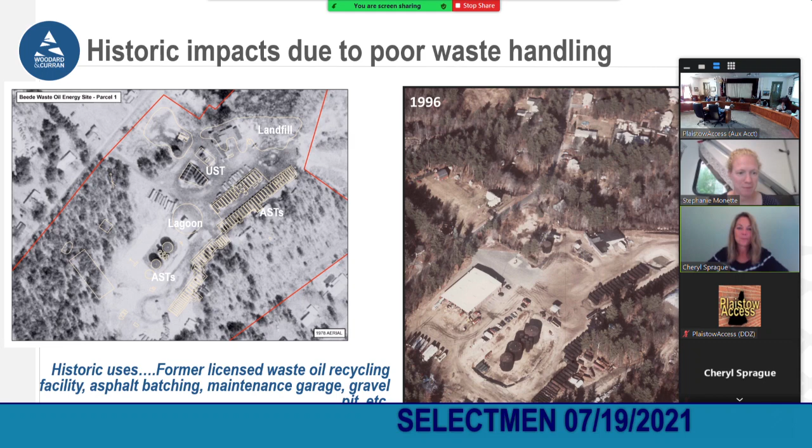Historically, this site's been in operation since the 20s, recycling oil. So you can imagine what it was like managing those types of things back then. These pictures, one's from 1978, an aerial, and the other is from 1996.

They were basically just tanks laying in a row. They were rented to people, and they would store oil in them and could come get their own oil. It wasn't all run by one operation, so it was quite a catch-as-catch-can type operation.

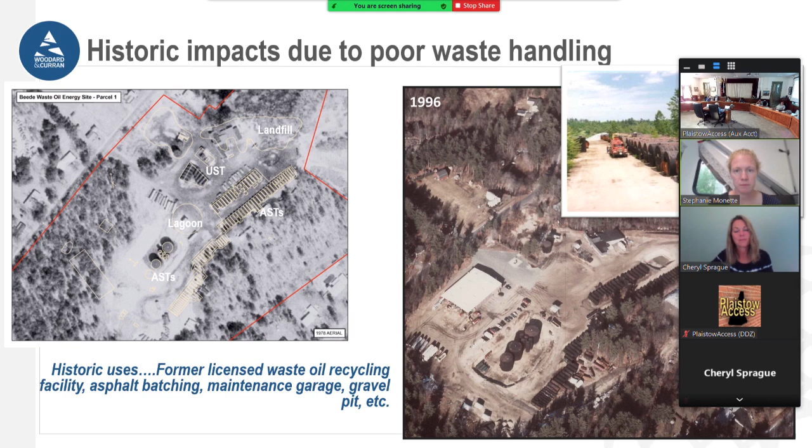The EPA did an initial removal action, which started everything. They got 1.1 million gallons of waste, oil sludge, and water removed. 800 drums were removed that had been stored on site, full of various oil and oil mixtures.

And in 2001 to 2005, they did a vacuum recovery system that the EPA put into place. There were pipes above ground with a huge vacuum system.

They extracted 90,000 gallons of oil out of the ground during that period, in a four-year period. 90,000, yeah.

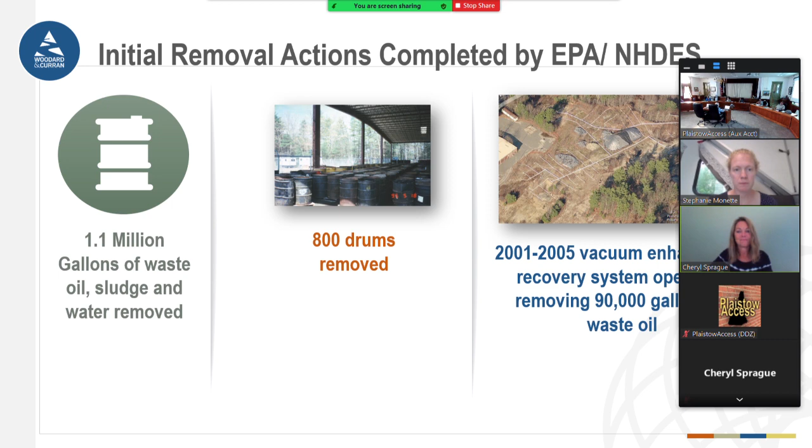Cheryl, do you want to cover this part? Sure. Can you see? Okay. Can you hear me all right?

Yes, okay, great. So as Mike said, the removal action addressed some of the more visible waste, the waste in the drums, the waste in the oils sitting on the water table.

But at the same time, there were investigations that were undertaken. They were called remedial investigations. And that looks at the soils, the surface waters, the groundwater.

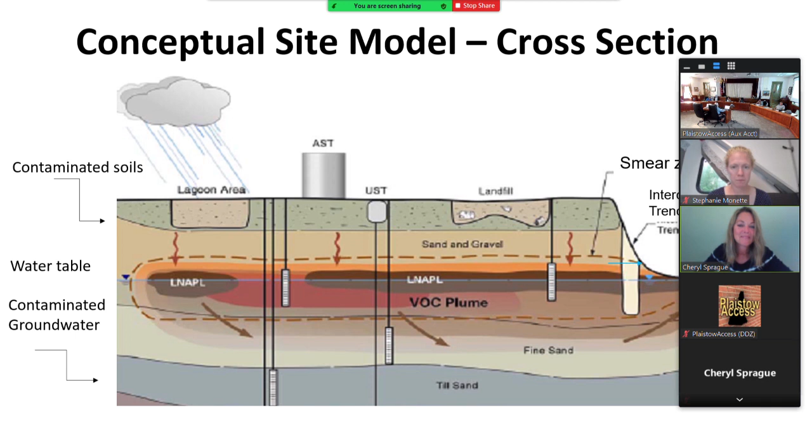You went through that one, so I'll go to the next one. In the end, when we take all that information together, EPA selected through this process a remedy intended to address all the risks identified, whether unacceptable contaminants in soils or groundwater, with cleanup actions intended to clean up for potential reuse. At this site, the area is residential, so the cleanup is intended to get to a residential reuse.

Since we've already been operating for a while, what I thought we could do is discuss the cleanup components we've already done or addressed. Then Mike can give more details on what we're currently doing. So this should come up.

The first remedy was addressing the groundwater, which was migrating. The first thing that happened was they built a groundwater treatment system as a component of the remedy and began treating it and discharging it on site. That was constructed starting in 2012 and was in operation by 2013. The other component of groundwater is long-term monitoring - in addition to treating groundwater, there's ongoing monitoring to assess if it's migrating, where it's impacting, and what the concentrations are over time.

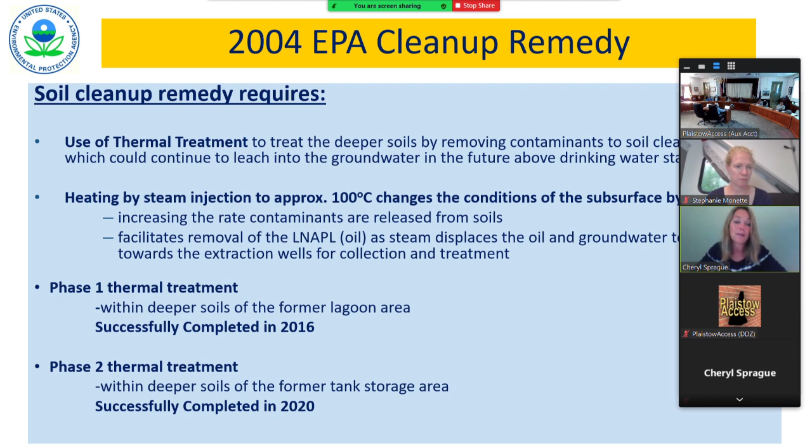We can come back if there's more details, and Mike will give you some of those. During COVID we didn't come back to present, but if you need more information we can continue with that. So those are the three parts of the remedy.

I'm not sure what the next slide is. Yeah, those are the three parts of the remedy that have already been implemented or completed as we went through this process. So it's a good time to ask, where are we in this process?

The Superfund process is a long process, but it moves you through steps: identification of a site, removal actions which address hazardous materials like mobile oils or drums, investigation, looking at alternatives, remedy selection, then remedial design, where you spend time designing how you're going to clean up the site, and then the actual remedial action, when you take those actions. When all these components of the remedy are completed, what you typically end up with at most sites is the long-term operation of the groundwater treatment system, because groundwater takes longer to clean up than addressing source soils.

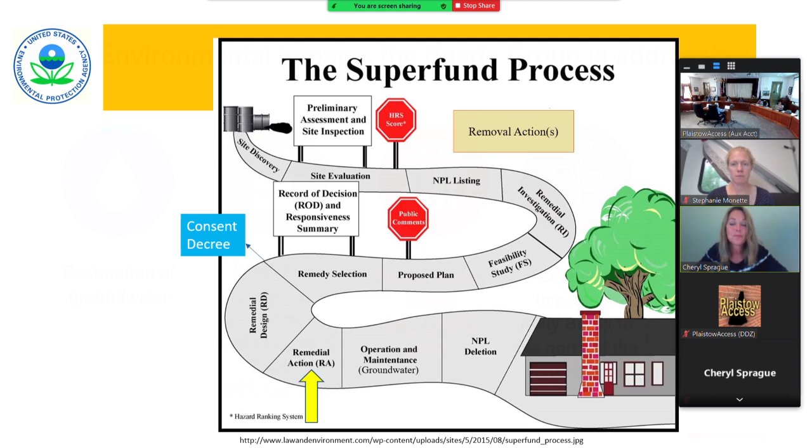The impacts the site group is addressing right now are really a groundwater issue. We need to restore the groundwater that's been contaminated, that's the biggest issue. But what contaminated it? We have deeper soil impacted by oil from the former lagoon, which Cheryl just talked about. There was also buried waste and debris in the area, an old farmer's dump. There was a hill, and they just pushed everything over the top of it. People could dump stuff there, pushing anything they didn't want onto the site. It slowly got covered and is also contaminated with oil.

There are sediment impacts, as you asked, Greg, to Kelly Brook, north of the landfill area, and I'll show you exactly where that is.

I can't see, I don't know how to move the... yeah. You can, if you have your mouse. I'm not sure what you guys are seeing, you're on the next slide, but I can't figure out what it is right now. I don't remember, but that's okay. There's a little dash up on the top left corner of the window. Oh, there we go.

Oh okay, yeah, of course, the shallow soil. And these all really came from poor waste handling. It's as simple as that.

The cleanup progress to date is we're moving forward. We did an access driveway and a traffic signal in 2012, near 121 Main Street where the school buses come out onto Main Street, so we could have more direct access to the site and trucking wouldn't go through the neighborhoods. The old gate is on Kelly Road, which wasn't very advantageous to people, since there's going to be literally hundreds of trucks carrying soil out. So that was done in 2012.

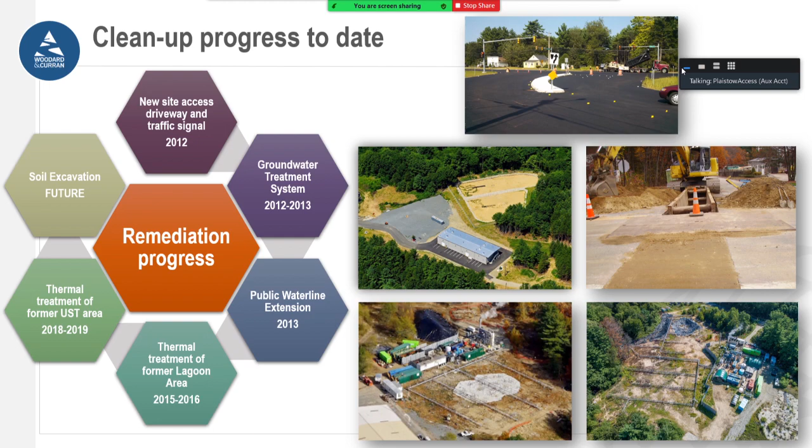The groundwater extraction system is a big plant, and if you come to the open house, you'll be able to see the plant. We open up the doors so you can see everything that's going on there. We try to be transparent so neighbors understand what's happening in the neighborhood.

We have extraction wells, seven of them. There are 3 that are more up-gradient, and 4 more that are down-gradient on the Howard Manor condo side. Those are hopefully helping to control some of this plume. They are shallow wells, not deep bedrock wells, but they do seem to be having an influence.

Those RIBs are very, very effective. That used to be a sand borrow pit years ago, and we basically hit the lottery when we found we had that there and didn't have to build it - it was natural. One of the other things we have is injection wells on the other side.

The injection wells are down towards Kelly Brook. Although the water from the RIBs is definitely going into the aquifer and influencing Kelly Brook, we can use the injection wells to also help control flow in Kelly Brook, so we don't impact its flow.

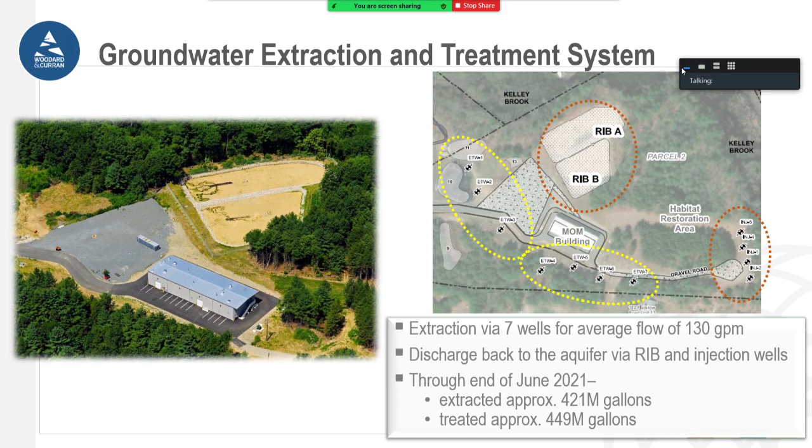Now, are you finding anything coming from north to south in Kelley Brook that would influence all of this also? I don't know all of the data on Kelley Brook. We basically are looking at the contaminants of concern for our site. I do believe there is MTBE in some of those wells on Fran Ave, one of them at low levels, that is not from the site. So the state is doing a lot of work in that area.

Steph, I don't know if you have any information on that yet or not. I can't speak to that specific site, but if you check out New Hampshire DES's One Stop, there's a mapper that will show you all of the other sites currently investigated or previously investigated in that area. It's all tracked and mapped on there.

Okay, thank you, that's very valuable. We load all of our data after it's been reviewed and approved - we give it to DES and they load it into there too. But there are other people doing other monitoring; the state is doing other monitoring.

So the bottom line, Mike, is you feel comfortable that the contamination from this site is not spreading to any other area? Yes, we do.

Good, thank you. One of the other things - the first question we got when we started pumping water, and it's a valid question, was: you're taking all this water out of the ground, when's my well going to dry? It's a great question, and that's why we're putting it all back into the same aquifer. We do not want to cause any influence, negative or positive, on those wells.

The other thing we have is an advanced oxidation treatment system, which knocks down the VOCs, the volatile organic compounds, and 1,4-dioxane, which is a chemical of concern recently. So we built a plant that could treat it to the lower levels now required for 1,4-dioxane, and we're taking all the 1,4-dioxane out of the groundwater we're treating.

The third thing we're treating through granular activated carbon is PFAS, which is also a chemical of concern that I'm sure you're aware of in the state. We have very low levels on this site, but we were able to put in tanks that can treat the PFAS. Carbon is very effective to handle PFAS.

How clean is the water leaving the plant? It's basically drinking water. It complies with all state standards.

Because our plant was really well designed, we were able to add the GAC, the granular activated carbon, to remove the PFAS. So we were able to step up and do that right away as soon as it became an issue.

Will this plant stay in effect for decades to come? It'll stay in effect until we've reached the remediation goals of the record of decision, the ROD that everybody talks about.

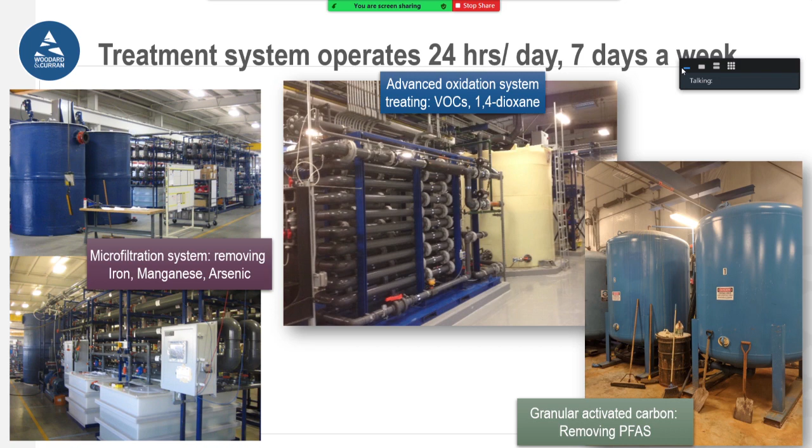Usually there's a process as it goes along where you can optimize the systems. If you're bringing in too much clean groundwater, you can move the wells. Typically they're moved a few times so you can make sure you're addressing the entire plume and get it down to a certain level. At some point you lose the efficacy of the treatment system, but for the most part you're looking to make sure you use it to reduce concentrations to meet those goals.

Groundwater conservation was a big deal, as I mentioned. We recognize the importance of groundwater, and this state has a lot of problems trying to have enough water for people. So we've treated over 400 million gallons of groundwater and discharged all of that back into the aquifer. We successfully used treated groundwater for steam generation during the thermal process. When you have steam, you need water to generate it. If we hadn't had a good treatment system to have clean water, we would have had to truck water in.

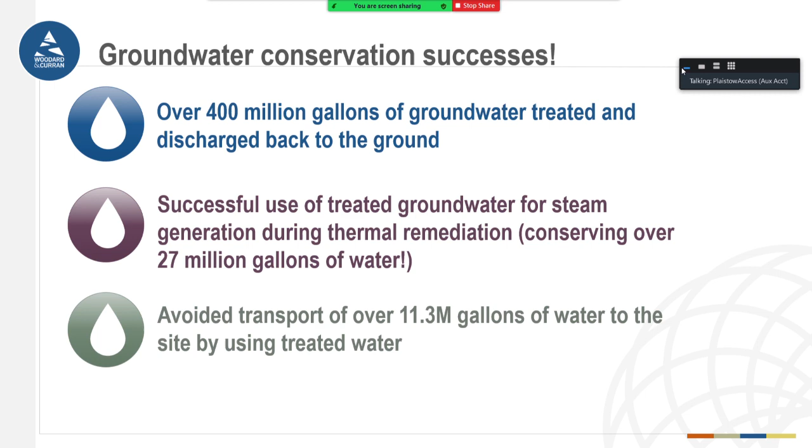That would have been 27 million gallons of water we would have had to truck in, and that would have all been wasted water. It would have been crazy. We also avoided the transport of 11.3 million gallons of water to the site—that's what was coming in. So zero impact on groundwater is our goal.

The thermal treatment system, when you hear about it, sounds like common sense, but it's very difficult to apply because of the substrate we're dealing with. What it does is generate steam, inject it into wells—it's a source. There are wells about 28 feet deep, if I recall correctly. It's very well organized, and it looks just like that module. There were, I think, about 40 units of wells the steam gets injected into.

Then we have what's called a multi-phase extraction. There's a vacuum that pulls out the VOCs, pulls out groundwater, and pulls out oil. And they all get treated.

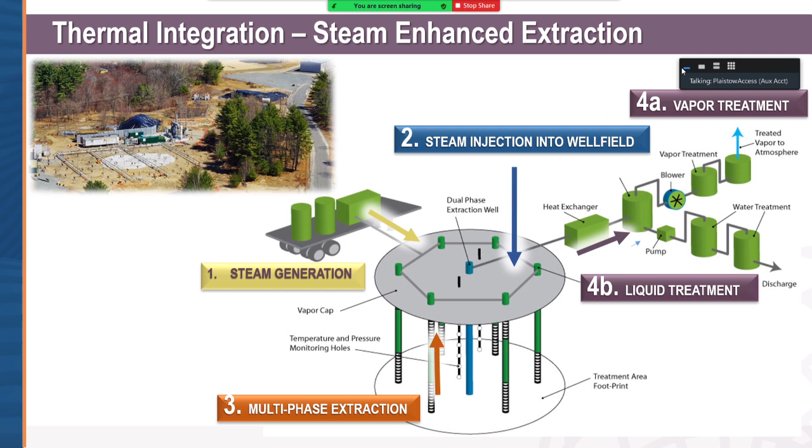The liquid treatment plant is just like any other water treatment plant. We have an oil water separator—the oil is collected, the water goes through several other treatment steps, and then down to the water treatment plant for final polishing. We could not afford to have oil going into the groundwater treatment plant; that would have destroyed the plant. So we had to have very robust treatment before it went into the plant.

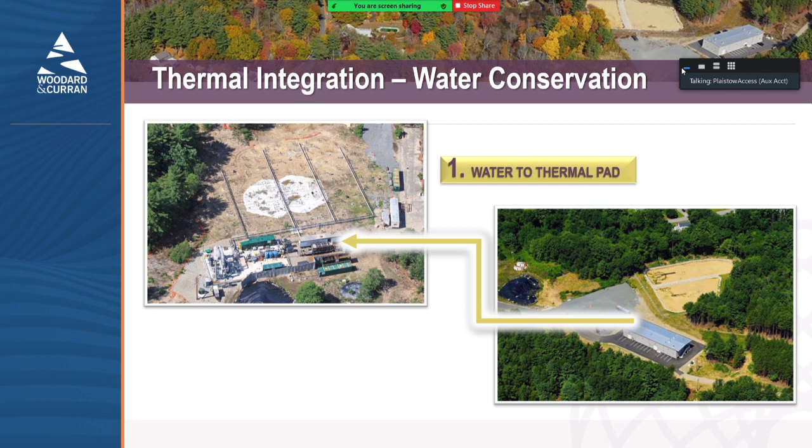This is just another diagram that shows you the water treatment coming to the thermal pad. We'll go through this quickly. Steam injection, the well field - you can see a little portion that's the phase one well field. That circle of white is a concrete cap where some of the wells weren't as deep, and you don't want the steam coming out through the surface and not being held in. So basically you put a lid on top of the soil and it keeps the steam in.

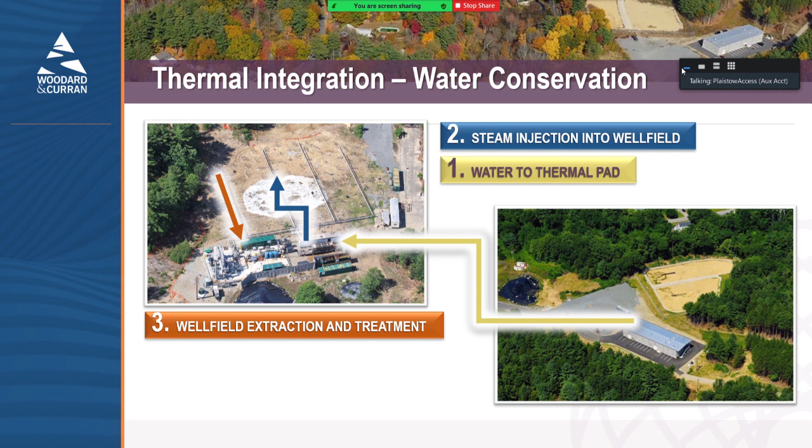The well field extraction treatment plant - we built a big pad there. The treatment plant was right on site, right next to the treatment area. Then the pre-treated water is sent back for final treatment at the MOM plant. Some of it goes into the RIB and the rest goes back for steam generation again. So it's a closed loop.

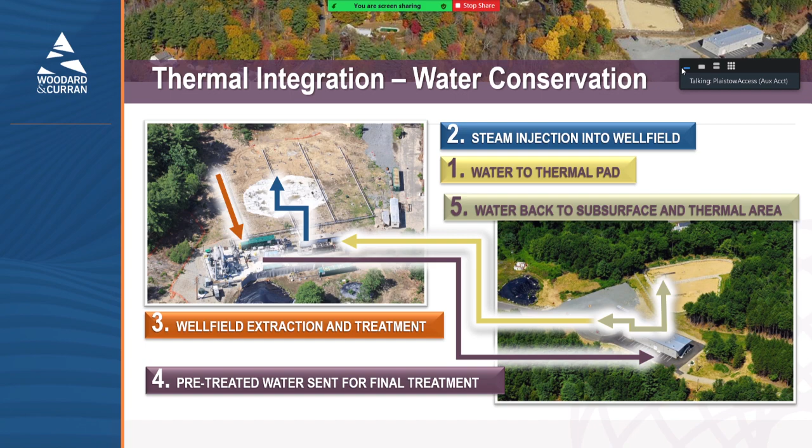Both phases were highly successful. We reached the boiling point of water across the treatment area - it had to be 100 degrees C. We were after naphthalene, which boils at the highest. It was the hardest one to get out. So we had to maintain 100 degrees C underground.

And all of the leachability soil goals were achieved in both phases. We removed over 500,000 pounds of VOC mass, which is a lot. It was destroyed on site, and we recovered over 70,000 gallons of oil, which had to be taken off site and then was thermally destroyed as well.

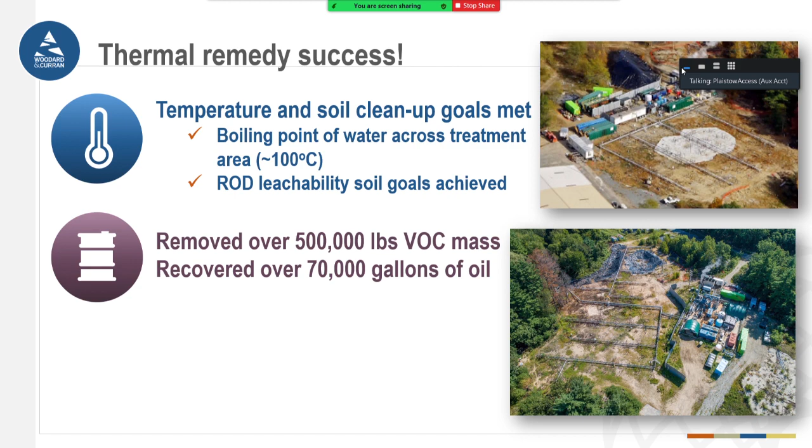Here's one - the EPA recognized this site as one of your wins for the year, correct, Cheryl? Yeah, and yes, we did see that this was put into the report, and a lot of it is this innovative use - the use of the groundwater treatment plant to inject the steam.

When I got onto the site, a lot of people didn't think there'd be a lot of success using this technology for the oils. Most of these technologies are used to drive a lot of lighter fluids out, everything into the gases. This site removed a significant amount - most of what came out was in the oils. And it's a very difficult thing to do. They did it, and this group continued as long as necessary to get to these soil cleanup standards.

So there was a longer treatment process, higher cost to them, and they battled every week to make sure this stayed operational through a lot of winter issues. So, yeah, they did a great job.

This is a highly data-driven process. You're monitoring 24/7. EPA has an expert, Eva Davis, out of Oklahoma laboratories, who is an expert in thermal. She worked with us - we had thermal experts, waste experts, groundwater experts, all involved in a team. They were all from different companies, and they worked together to get this done. It was very successful.

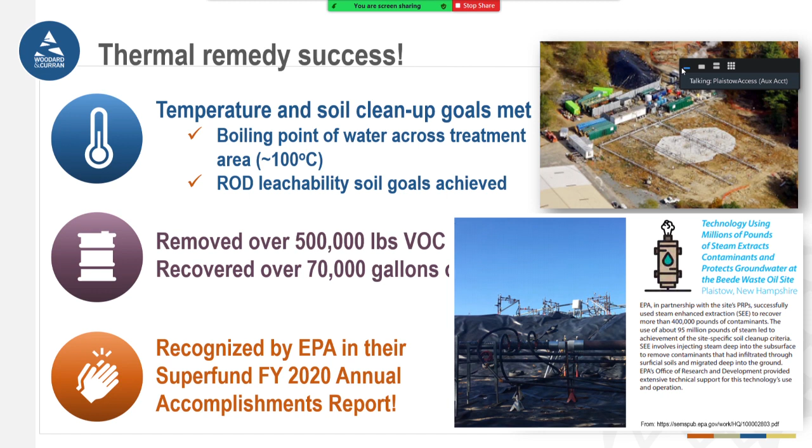This is your slide, Cheryl. Yep, all right. So Mike just gave you a recap of the three different phases that we started - the groundwater treatment system, and then the two phases for the deeper soil, so we could remove most of the sources out of the site that would continue to impact groundwater.

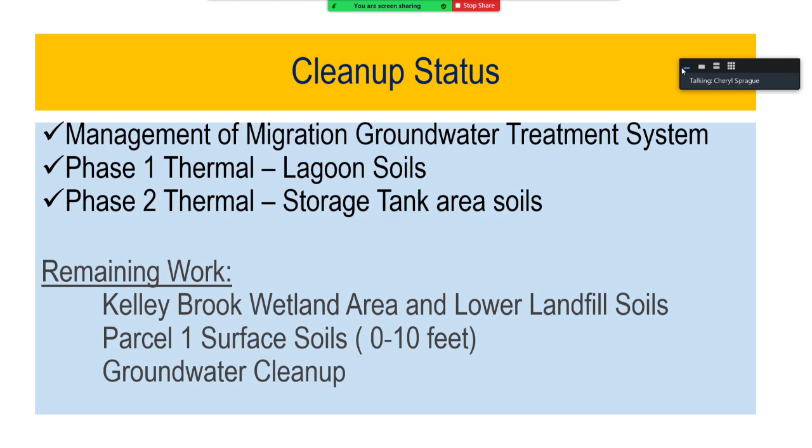So that was a big, significant first step, but there was more work to do. The remaining work and remaining cleanup requires a few more components. This comes back to addressing the Kelly Brook wetland area sediment and the soils above it, which includes the lower landfill soils and the debris soils underneath it, and also the parcel 1 soils. Those are the soils that across the land have been impacted by lead and PCBs from the spillage of materials onto the surface. And we will have remaining groundwater cleanup at the very end.

So you can go to the next one.

So the current work they're doing, the final phase of the remedy, requires not treatment of the soil but excavation and offsite disposal of these contaminated soils. These soils pose a dermal contact and incidental ingestion risk for future users of the site, for residential and recreational use, between the lead and PCBs in the soils, and also for ecological protection, identifying a risk to songbirds that could ingest the lead at the site.

So the cleanup remedy of soils, and then complete the lower landfill, the wetland areas, and the miscellaneous soil piles made up at the site from the original owner's use. As we move forward into this phase, what we realize is that after doing phase 1 and phase 2, there's something down by the lower landfill that couldn't be used by the thermal process because it was close to rock, and there's all this debris mixed in with it, so it wouldn't be a good fit.

So one of the things is that we split this up into an area where they would excavate those materials, which includes the lower landfills, the wetland soils, and adjacent to it, the sediment in that area. That's going to be the first phase, and it's going to work on starting that aspect of it. The remedial design for that is supposed to be completed this fall, which is great.

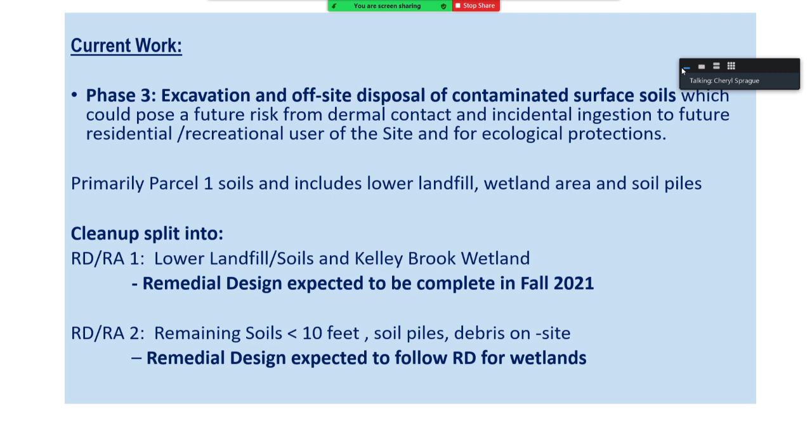You can go to the next one.

Okay, and Cheryl just gave you a preview of what we're working on now. We have the ongoing operation of the groundwater plant, and the monitoring that Jay talked about - that's routine, we do that all the time. The biggest reports are done in the fall. It's very important for us to keep track of that because we don't want any red flags to come up, so we can react right away. When the PFAS came up, the Beede site group decided to react right away, put a treatment plan in, and it was taken care of.

We have a wildlife habitat area. I don't know if any of you have been watching some of the things on Facebook and so on - that seems to be the most popular thing that people like to see, because it's interesting and fun.

We're going to move into the design of the landfill smear zone, which Cheryl talked about. The groundwater, the oil floats on top of it. The level of the groundwater goes up and down, so you have oil attaching to soil, and it's just basically smearing it up and down. That's what we're going to be attacking next.

Are you anticipating any difficulties this year? I know the last few years the water table has been kind of low - we've been dealing with drought and stuff. We are prepared to deal with wherever the groundwater table is. Yeah, and that's what takes the longest part of the design, making sure that you get down low enough that you've reached the bottom of it, and then easily you have the top of it. But yeah, that's part of the design, is consideration of that.

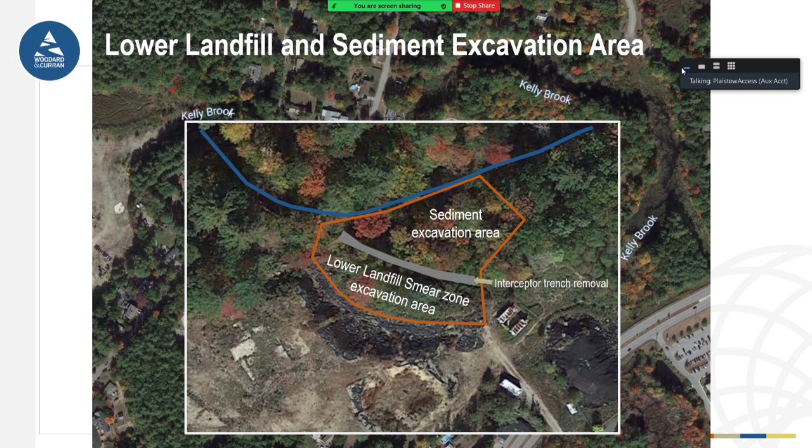And then the smear zone area is sort of up gradient of that area - it's sort of an uplands area. There's going to be debris and soil taken out where it says lower landfill area - that's about 3,700 cubic yards. The smear zone soil, another 1,800. And then sediments, around 300.

Actually, we're just putting the data together. We did what we call a pre-design investigation, and we go in and confirm that the work that was done years ago is still accurate, and that it still makes sense to design the way we had thought about doing it.

And we just completed that, and we're putting those documents together.

The estimated truck trips to do this work is about 580 round trips of trucks. Half of that would be taking soil out, the other half would be bringing fill in. It's a lot of trucks. We try and control that so there's low impact on the neighborhood. We were successful when we put the driveway in, we thought, but that wasn't nearly as many trucks as we're going to have to deal with for this.

12 months of the year, winter, summer. Hopefully this excavation will only take one construction season. I'm not sure yet, we haven't done the full design. We haven't gone out to look at contractors, but I'm thinking probably 6 to 8 months outside, but don't hold me to that.

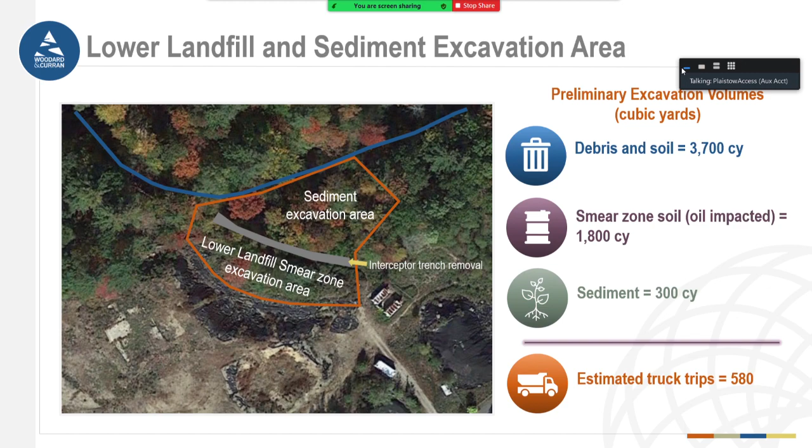Starting next spring, yes, we'll start in the spring. We'll be starting in the springtime. We put in some what they call sheet pile walls.

What we're going to do is basically make a big bathtub. We'll make another sheet pile wall that goes near where that interceptor trench was, on the outside towards Kelly Brook. So we'll have a big bathtub that we'll be excavating out of. And then we'll have the off-site disposal, and then restoration of the area in the fall.

Just a quick question on the excavation. So when you pull it out of the ground at the site and the truck leaves, is there anything that's done to the outside of the truck, or is it fully contained within the bed of the truck so that there's no...

That's a great question. Yes, there's a lot done, frankly. First of all, we're going to be doing dewatering because it's going to be down into the groundwater. We'll have to do dewatering, and we'll pre-treat that water and take it to the MOM plant. So I won't say that the stuff they're taking off is solid, but it's not slushy wet.

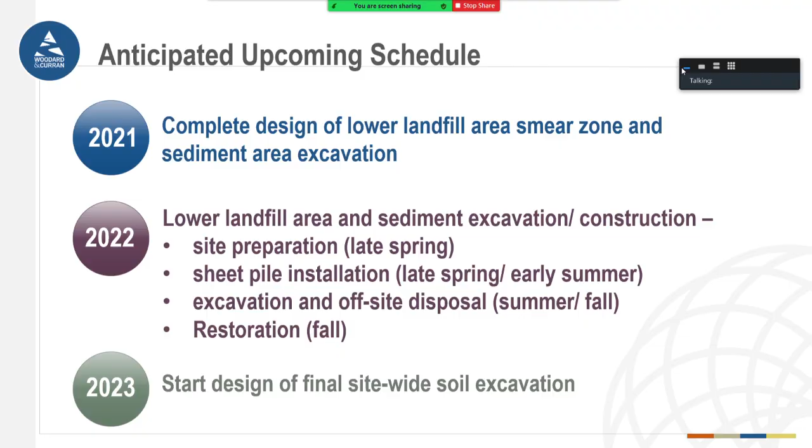Yep, great. So these are the design plans, and as we said, following this one will be another design for the larger excavation, which obviously will have more trucks.

So one of the things we can institute again is maybe some quarterly Board of Selectmen meetings so we can keep doing these updates, because I think this is going to happen fairly quickly as we go forward, and we'd like to make sure we can keep the information flowing.

I think there's also continued discussions that have to happen on several different things. We don't want to highlight them here, just to say this is what we think should be coming up. So what I mentioned is there's a required public meeting before each phase, before they start the action. So when they put together the plans, they come out and tell the public, this is how we're going to implement it.

This is how it might impact you. This is how long it will impact you. And this is how we think we're going to get it done. So they will do that, and we can expect that to happen.

The other thing that's coming up is another 5-year review. EPA reviews sites every 5 years for protectiveness. Is the current remedy as it is protective? Did any new information come up that makes the remedy not protective? And we produce those every 5 years.

So we produced one 5 years ago, we're coming up in 2022, and that includes town interviews. So the town will be interviewed for their concerns and their consideration as to the current status, and that becomes a public document at the end of the year.

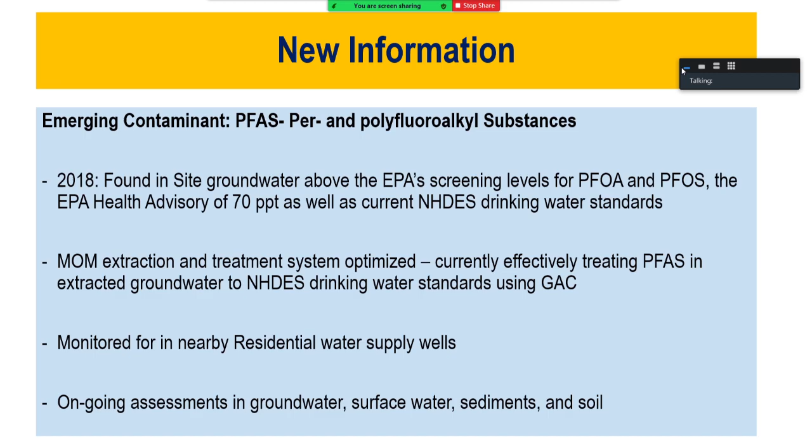I think this goes back to you for your addition. Okay.

This is the part some of you have seen on Facebook—we're going to go through it. This is part of the site. We have two parcels, parcel 1 and parcel 2; it was tough naming them. Parcel 2 is not contaminated. The groundwater treatment plant is on the edge of parcel 2, and the rest is a wooded area. A long time ago, the group started talking about maybe doing something actively to maintain what's there so we aren't impacting the environment. It's a wildlife habitat area, and it's supporting habitat very well.

One of the things we've done there is a number of projects. This area is certified by the Wildlife Habitat Council, and we have to do certain things to maintain that certification. We've restored a native meadow. We're monitoring and refurbishing habitat-enhancing brush piles—seems simple, but it's something the critters need, a place to live. We maintain those. We have a bat house that houses thousands of bats if we can get them to move in. Students at the high school also made bat houses as part of the STEM program, and we put them up and studied what kind of bats were there—interacting with the high school on that.

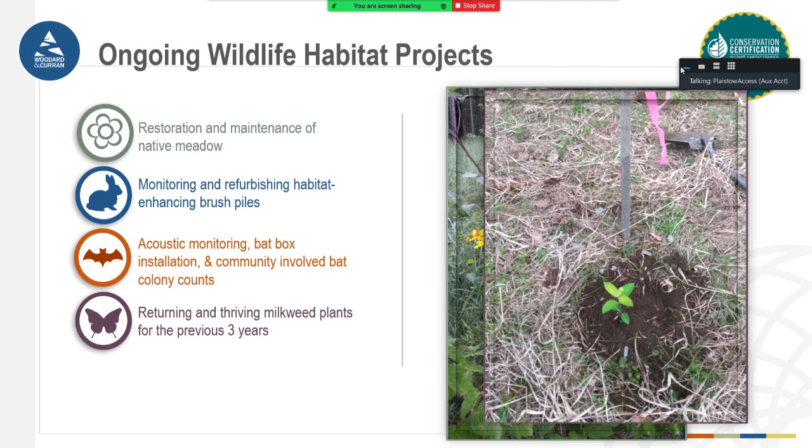We have milkweeds there, we're doing pollinators—all the natural things that should be in an area that's actively monitored and maintained. One of the things the group does is sustainable actions, which are recognized by the EPA as helping the environment—any work reusing or recycling things on site. We track all of that with the work being done, and obviously treating the water is also a sustainable action.

The diversity on the site is amazing—different types of birds, bobcats, deer. If you've seen them, I urge you to look at the Facebook posts. Honestly, it all just shocked us. The skunks—I mean, anything you'd normally see around here—the raccoons. We constantly get pictures taken, and we have video of a lot of that now.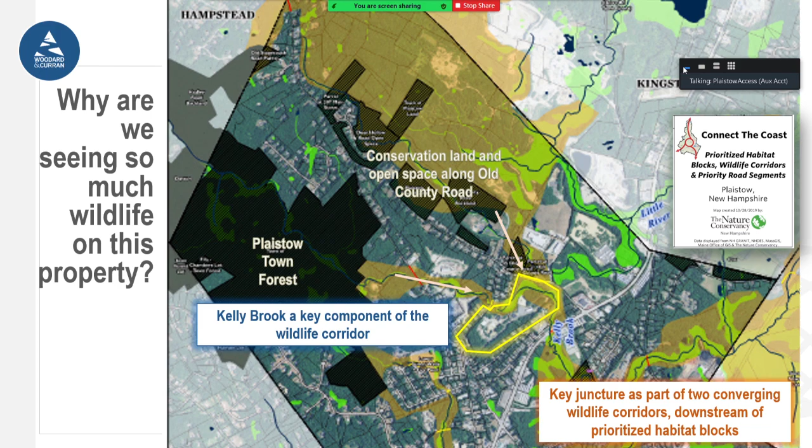The Nature Conservancy, with Connect the Coast, we've been talking to them about the importance of this, and there was actually a phone call today with your Conservation Commission and the Nature Conservancy. We'd like to do a public service presentation in the fall with the Nature Conservancy about the importance of the site to the Nature Conservancy and the Concom. Jill Center was talking with our people today.

So long-term, 20 or 30 years, do you see this site becoming part of our town forest area, or something to that effect? Is that a good use for this property? Personally, yep, I think it would be a great use for the property. That will probably be a decision that the town hopefully will start thinking about. It was 20 years ago that the reuse process went through, and there were different reasons for some of the things that came out of that process. Now we can have a vision of what's there, what's been done, and the viability of that area is amazing, in my mind.

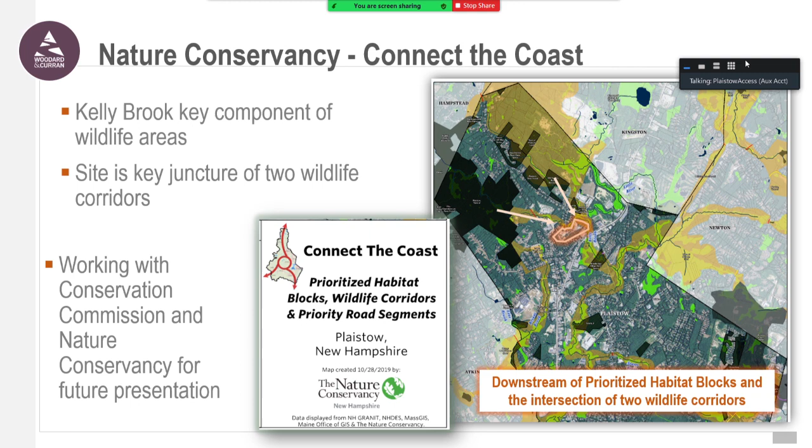I'm not a professional biologist, but just looking at the pictures and what's going through there, and now that we're talking to Nature Conservancy and some other people, we're getting a better understanding. That's probably something Jill Center and the Concom would be thinking about now that we're interacting more with them. Several members - Buzzy, who is a member of the Concom, came to our last open house.

We pulled this out of your town plan, and you can see where the site is situated. As you all know better than I, it's basically another pearl on the Kelly Brook that goes through the town forest.

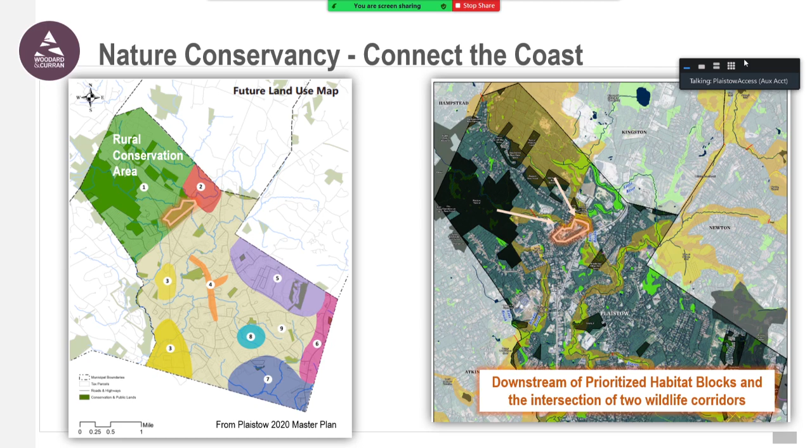Some of the community things we'd like to show we're doing here is we've worked with the STEM program for about 3 years, and now we're very active with them over at Timberlane. The students are putting projects together, and it's great for our engineers to interact with the kids. They go over and do presentations, and it's been a very good give and take. The teachers have gone through the remediation part of it, and the physics and math, and then the biology. It's not just the wildlife, but also the engineering of the remediation we're completing over there.

The Girl Scouts come out, the Boy Scouts come out, they do bat counts. We have little apps for our phone - we can tell you what kind of bats flew over your head. It's amazing the things we can do there, and the open house usually does all those things. UNH has come out with some of their engineering classes to tour it, so it becomes basically an open outdoor classroom.

Our engineers helped on the Plaistow Pride Day too. They did the road around the site and got quite a bit of trash.

One of my pet things - when you go into a community and become part of it, you should use local workers. The workers we hire to do special work have to be specially trained, and they cannot come on site, but we have a clean area on our site too. So we hire a lot of the smaller contractors in town, and they've been working with us literally for the past 15 years - electrical, some building contractors. They've helped us put the water line in. So we try to interact with the community in that regard as well.